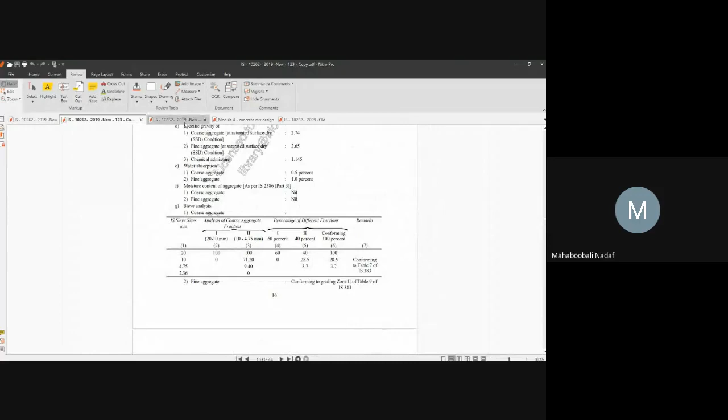Up to this we have completed. Now we have to do this portion. What is that portion? Any water correction we have to make in site or not? That means whether the aggregates are absorptive, we must check water absorption, or aggregates already have extra free moisture. So that is also you have to do.

If aggregates will absorb the water, then you need to add water. Correct? Yes, sir. I will just make it bigger. Whenever aggregates are given in this condition, if water absorption of coarse aggregate is this much and fine aggregate is this much, aggregates will absorb water from the concrete. So to counteract that, we want to increase the water.

If you are increasing the water, you have to decrease the aggregate to make it stable. In this problem it is not there, but if moisture content is present, that means any aggregate already has some extra moisture, then water content has to be reduced and aggregate content has to be increased. Is this point clear? Yes, sir. Now for this I will draw a table.

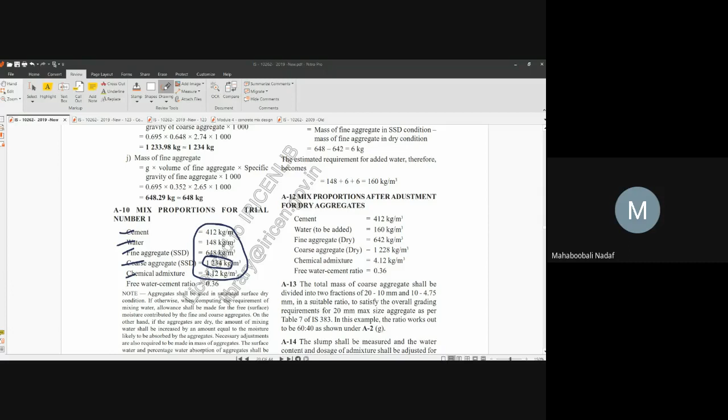Okay, now 1234. Here I will write 1234. For fine aggregate I will write here. Now, for coarse aggregate, how much is the absorption value? This one, 0.5%. 0.5% of this, how much?

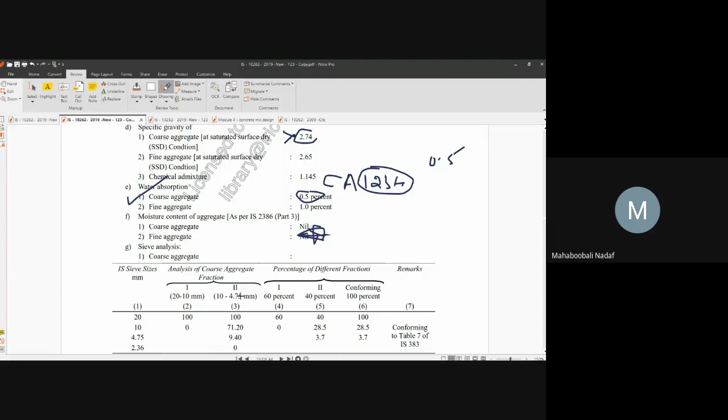Just 1 minute, prayer is going on. Just 1 minute, okay? Okay, now shall we continue? Yes, sir. Everyone, please give response.

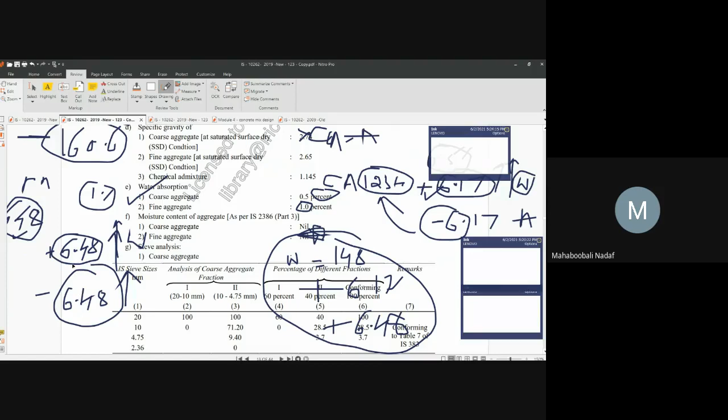Now for coarse aggregate, we need to deduct this value. That is why I have written with minus sign 6.17, the same value. So 1234 minus 6.17 is the site corrected coarse aggregate. Similarly, here 648 minus this is corrected fine aggregate. Is that okay now? Yes, sir.

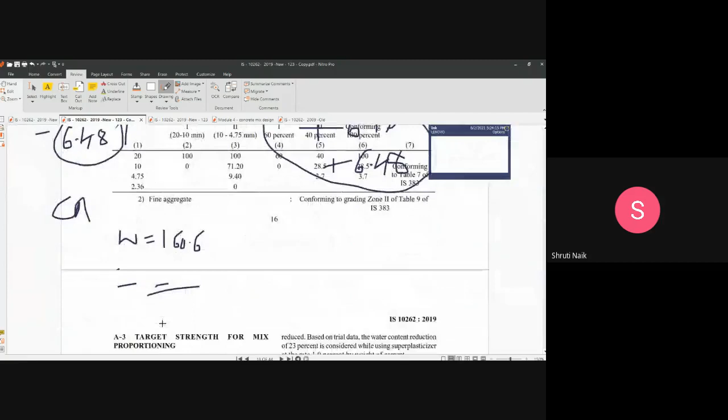Corrected water content, how much did you tell? 160.6, correct? Yes, sir. Corrected coarse aggregate, how much are you telling? 1234 minus 6.17, how much? 1227. Please remember these values, okay?

Corrected fine aggregate, how much? 648 minus 6.48, 641. Okay, remember these three values.

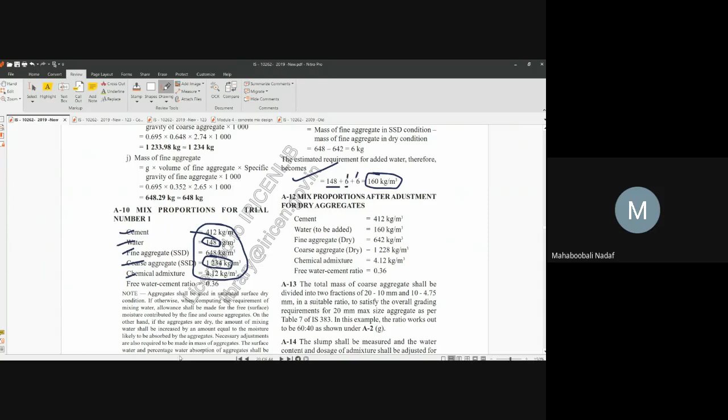Correct? Yes or no? Yes, sir. So what they have done, 148 plus 6 plus 6 - this is for coarse aggregate, this is for fine aggregate. Now you come here, fine aggregate or coarse aggregate?

Coarse aggregate. How much is the coarse aggregate, our value? 1227. Whether that is what they have done, where is that coarse aggregate? This one, yes or no? Yes, sir. Correct, na? Yes, sir. Similarly for fine aggregate, how much have they done?

642. Our value is how much?

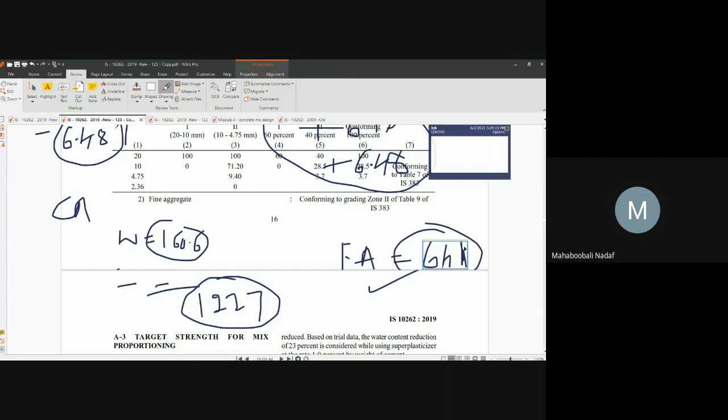Our value is how much? 641, 641 point something. So that is correct. Yes sir, okay na? Now the problem is over.

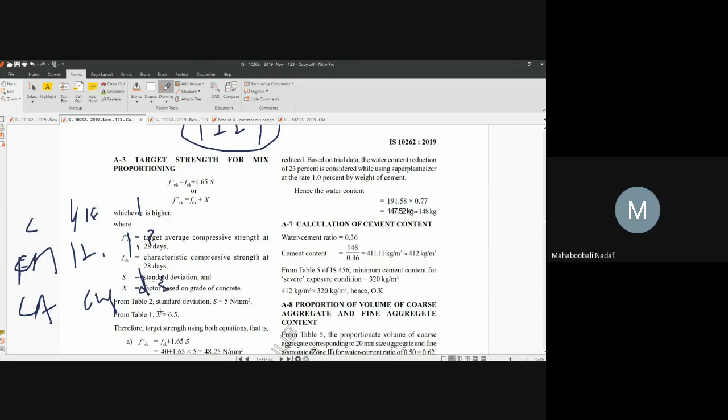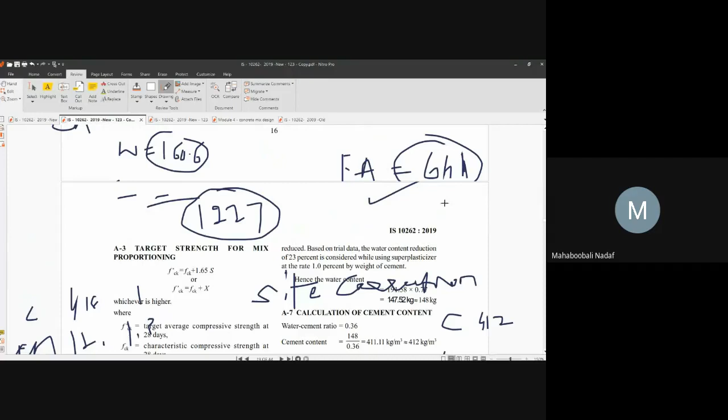Mix proportion, remember? Percentage. Yes, the same thing has to be done for this also. You have to write at the heading site correction. You have to do site correction. After that, you have to write cement, fine aggregate, coarse aggregate. Their values 412, and what is corrected? 641.

1227. So can you divide it by 412? 641 divided by 412. Yesterday, how have we done it? 1.57. So similarly, you do it for this one.

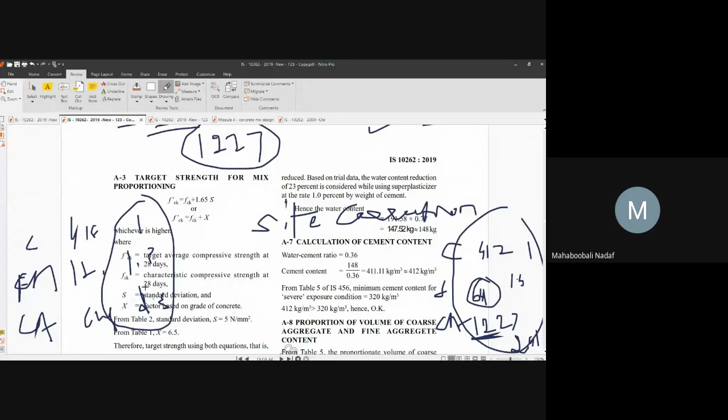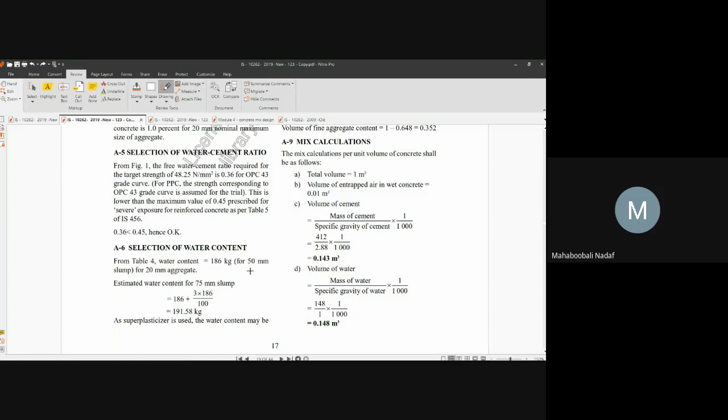Okay, very good. So my suggestion is that you at least practice this one by seeing the video. You have to make your own notes for this type of problem. Is that okay? Until and unless you prepare your own notes using the video, then only you will have sufficient grip on this problem. Otherwise you will forget.

See here, how they have done it, they have solved the problem, but according to our steps it is not there. They have done it like this, but I am telling you in the easiest way. So that is why make your own notes for this.

So the same thing they have written after correction, whatever you got. Correct? So this is before site correction. You have to write it. And again, here you have to write the ratios of whatever you have calculated: fine aggregate divided by cement, coarse aggregate divided by cement. Like that you have to write. Is that okay?

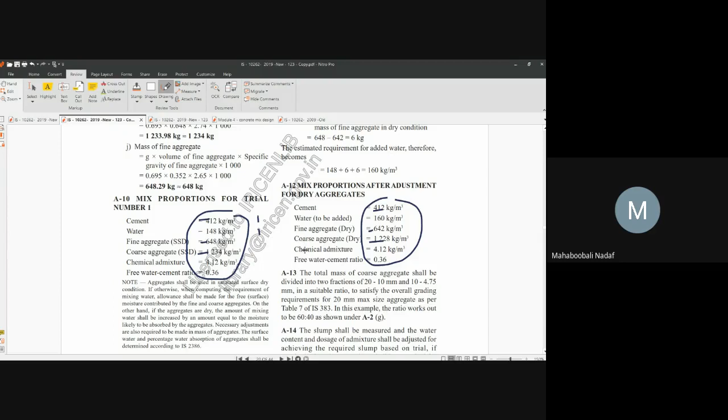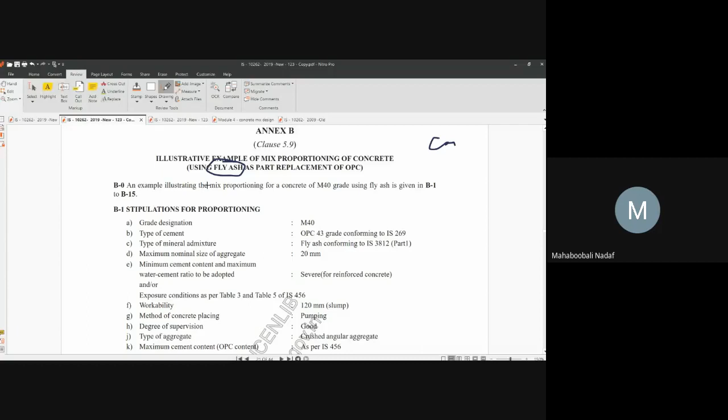Shall we go to the next problem? Okay, so in the previous one, this problem also we are doing by 2019 edition only. Tomorrow we will solve using 2009. Here we also do 2019 only because we will continually solve two problems. In the previous problem, only cement was there, but in this problem they are asking us to add fly ash.

Is that okay? Now please read the data carefully. Grade they have given M40, cement 43 grade, normal. They have also asked us to add a type of mineral admixture. What have they asked? Can anyone tell me? Fly ash.

They have asked us to calculate fly ash. Second, what is it? Maximum size of aggregate 20 mm, very important. And what is this? Severe, for reinforced concrete.

Others can also give response. Okay, others can also give response, no issues, but if you're simply sitting quietly then you will not understand the problem clearly, it's your problem. So many times I am requesting, you people are not at all answering. It's up to you. Climatic condition, very good, very good, very good.

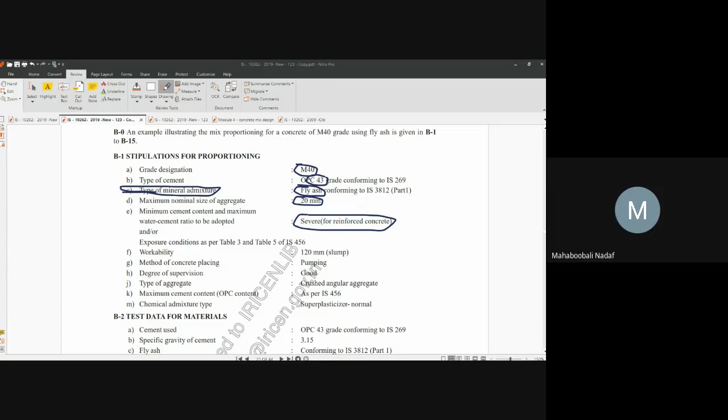What is this? Outside environmental climatic condition, exactly, this is called exposure condition. Okay na? At least tell me whether you are following me or not. Everyone please give response, at least whether you are following me or not. Okay, at least try to give that much. You are not able to answer, forget it, okay, at least give me that, sir we are following.

Take a pen, paper, calculator, and also the table. Now what was the slump given in this question? How much, fast read it. 120 mm slump they have given, and normal placing of concrete is not there, but you have to do pumping.

Degree of supervision good, so type of aggregate crushed, that is no problem. Cement content we have to refer to IS 456. Plasticizer also they are using. Specific gravity of fly ash, super plasticizer, specific gravity of coarse, fine, super plasticizer. Here they have given what?

Water absorption has been given, and also free moisture has been given. Here they have directly given 2 minus 0.5, meaning total moisture content is 2, and absorption is 0.5. So free moisture is actually 1.5. Like that you have to understand, while solving you'll be knowing.

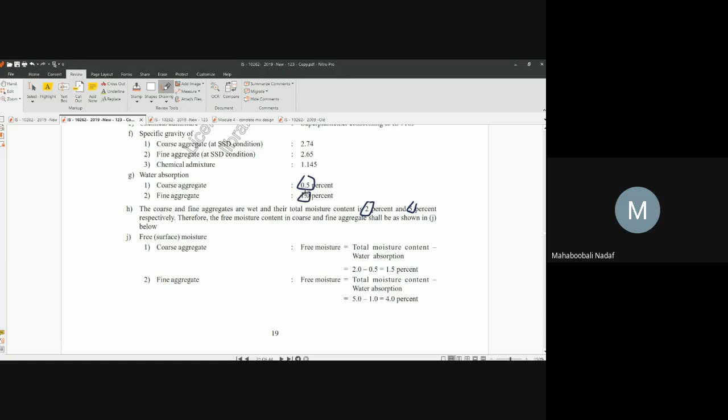So here only you try to understand, moisture present is 2% for coarse aggregate. For fine aggregate, moisture present here is 5%. Absorption, no doubt, you forget this one. Try to concentrate here.

Now this is the last table, and it is zone 2. Now one by one we will proceed.

First step, target mean strength. So yesterday you have done this. Tell me, FCK dash equals FCK plus 1.65 into S, or FCK dash equals FCK plus X. So now which table do you have to select?

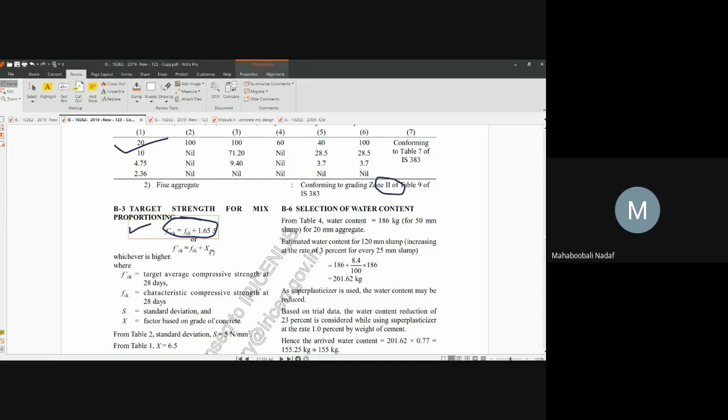Table number 2 and table number 1, sir. Very good, very good, very good, Shruti. You are a very good person.

So for table number 2, what is M40? Standard deviation is 5. So what are they using? FCK plus 1.65 S. What S value is used here? 5 Newton. So this answer is coming out to be 48.25.

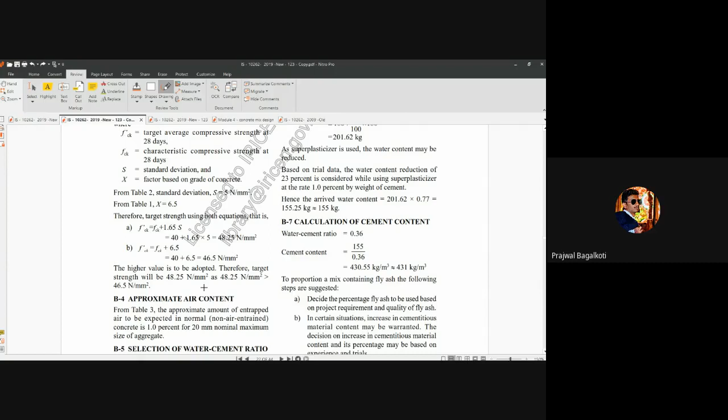Next step is the volume of air. So how much air do you want to take using this table? Table number 3. So what was our aggregate size given in the question?

20 mm, sir. For 20 mm, what is the percentage of air? 1%. So how to write that one? V air equals 1%, or 0.01. Is that okay? Yes sir, okay very good.

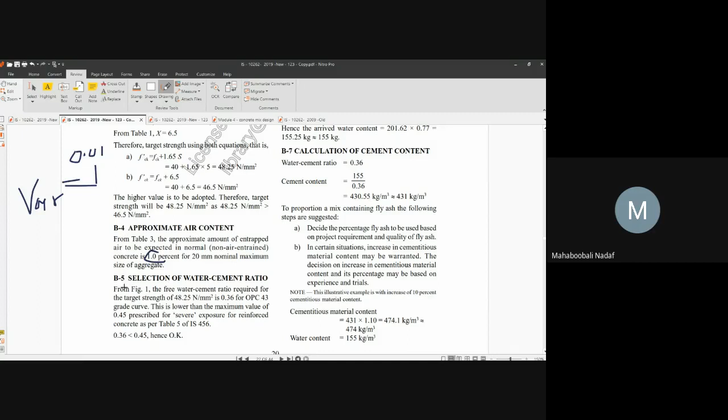Now shall I go to the next step? Sure sir, yes sir. Selection of water cement ratio.

Selection of water cement ratio. So which graph? What is our target mean strength? You remember this one, 48.25. Which graph do I have to select here? OPC 43 grade curve, 43 to 53.

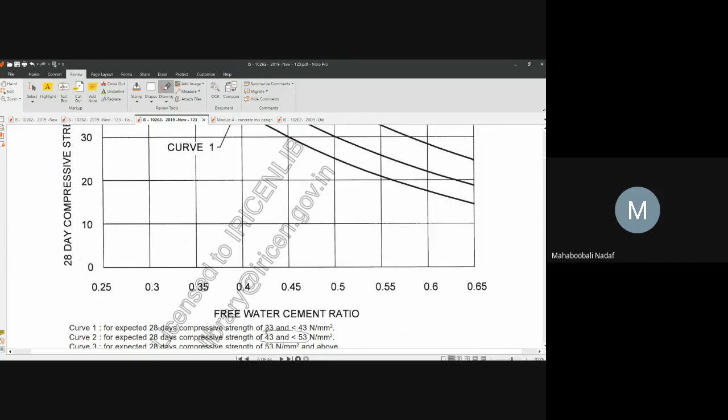This is curve 2. We have to take curve 2. In curve 2, I have to take 48 like this, and project like this. So yesterday also it was here only. So we are going to take next to 0.35. How much? 0.36. Very good.

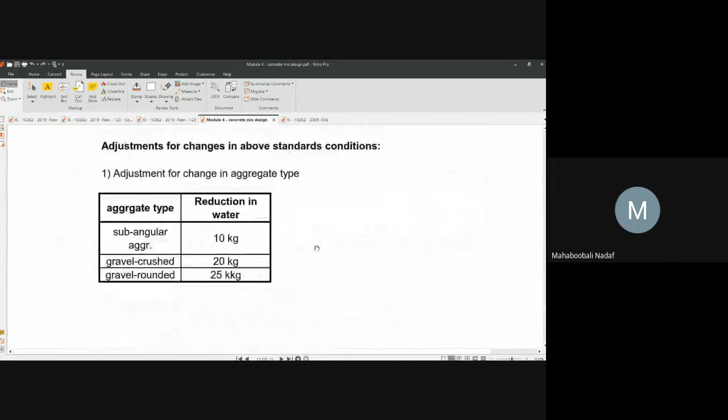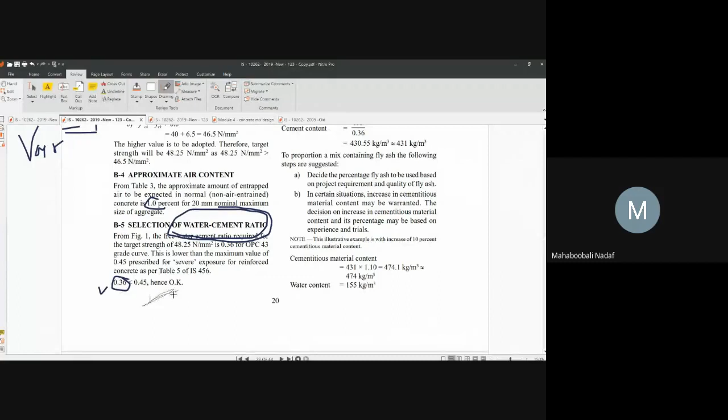So what is the maximum? 0.45. What is adopted? 0.36. So it is less than 0.45, hence it is safe. Is that okay? Yes sir, yes sir, yes sir.

Selection of water content. So which table do I need to refer to? Table number 4. Very good, Shruti, very good.

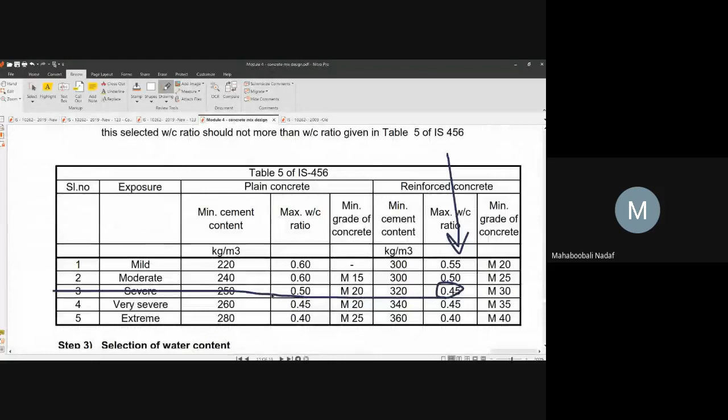So how much should I select? What is the aggregate size given in the question? 20 mm. So what is the water content? 186 kg. So they have taken 186, but that is for how much slump?

50 mm. First, we will check the condition whether the problem is angular, crushed angular, or some other angular aggregate. Crushed only. So there is no correction for this one. Is that okay?

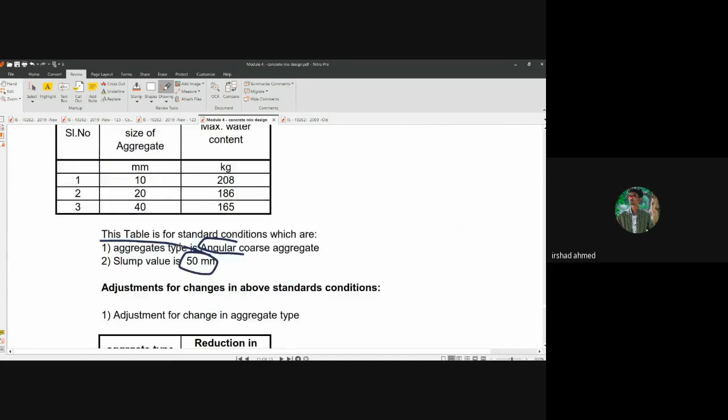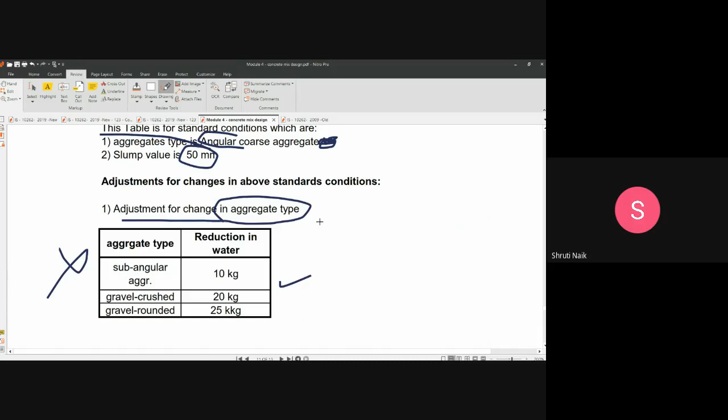If there is a change in aggregate type, whether there is any change in aggregate type compared to our standard angular coarse. No, sir, this is our standard. In the question also they have given the same thing, so there is no correction for aggregate. But have they given 50 mm slump in the question? 120 they have given, sir. 120 mm slump they have given, so that is why we have to make the correction.

Now you tell me how much increase. 70, sir. 50 to 120. Okay, so how much increase? 70, sir.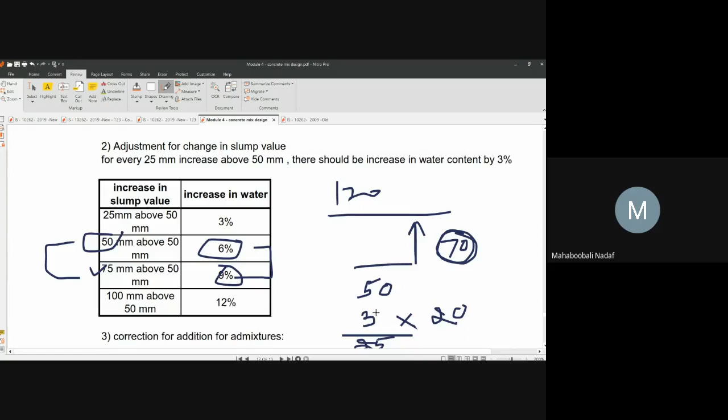It is just less than 9. How to do this one? Take the difference of this, take the difference of this. So that is what we call, in mathematics, interpolation. We call it as what? Interpolation. For 25 mm change, 3%. So for 20 mm, how much? This is called interpolation. 2.4.

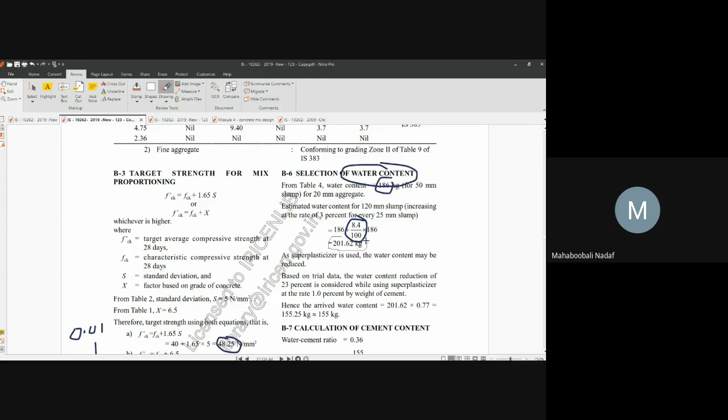3 by 25 into 20. Simple mathematics. So this is 2.4. This 2.4 is added to 6. Is that okay? Yes, sir. That is what he has done. 8.4%. So how much is that? 201.62 kg. Now this step is clear. Now, they have given superplasticizer in the question, and we know that we can reduce the water content up to 30% if we are using superplasticizer. So that is why that person has selected 23% reduction. So directly he has taken 0.77.

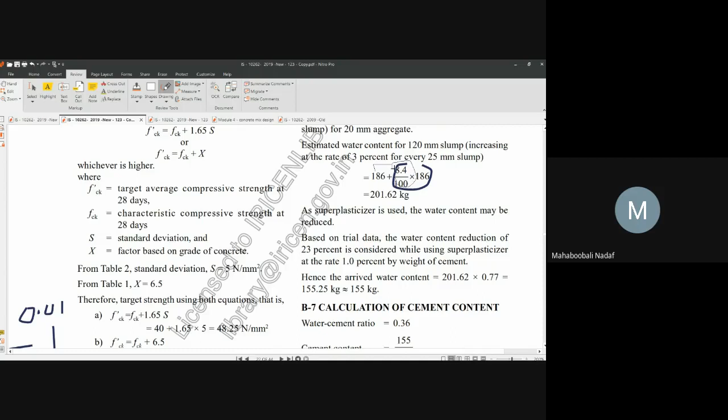If this value has to be reduced by 23%, how are we going to write it? 201.62 minus 23 by 100 into 201.62. Very good. How much is it coming?

So how much? 155. Very good. Is it clear now for everyone? Yes, sir. Very good. What is your name? Who has told the answer? Sir, Irshad Ahmed. Very good. Participate like this, then you are going to understand. Okay? Same thing. So what have they done?

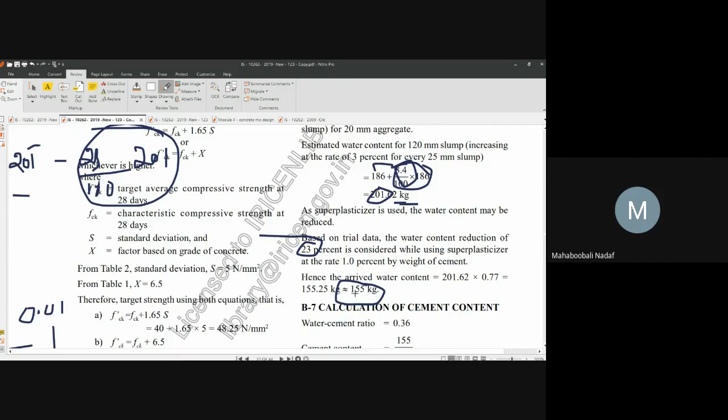Original value, 23% decrease: minus 23 by 100 into this value. So it is coming out to be 155. This is your corrected water. Okay? Now, as usual, we know the water cement ratio. Sorry, cement content is equal to water content divided by water cement ratio. How much is it coming? 431. This step is clear for everyone?

Yes, sir. Okay. Cement content is equal to water content divided by water cement ratio. So 431 is coming. Now, in the question they have asked that we are adding fly ash. So this is not cement, this is cement plus fly ash. In the previous problem, only cement was there, but in this problem cement plus fly ash is there. So 431 includes cement plus fly ash.

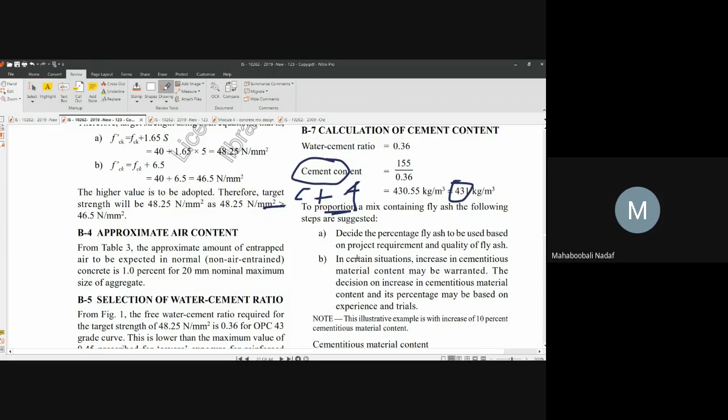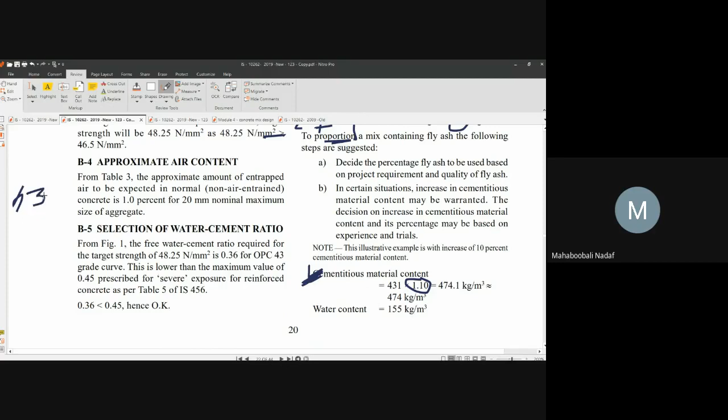Because we already studied in module 1 and module 2 that fly ash reacts late. Correct? To have better strength, they are increasing this cementitious material by 10%. That is why we multiplied by 1.1. How to increase 10%? 431 plus 10 by 100 of 431. This is the increase, no? Yes, sir.

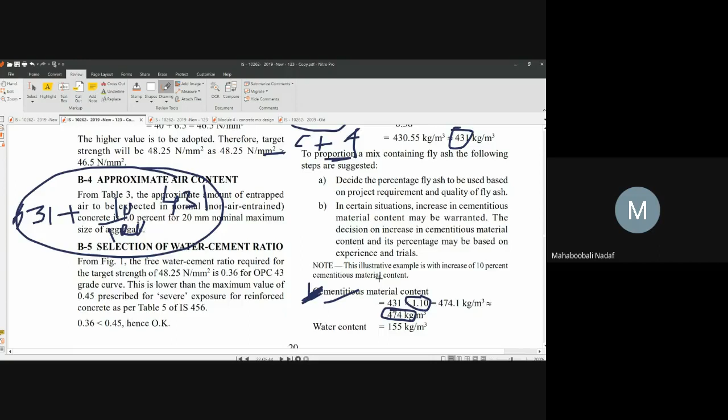This is simple mathematics. They have increased the cementitious material by 10%, so 1.1 into 431. How much? 474 kg. This step is clear? Yes, sir. So 155 is the original water. They have changed the water cement ratio. Why? We have increased the cementitious content, so the water cement ratio is going to change. Yes or no? Yes, sir. Now, next step.

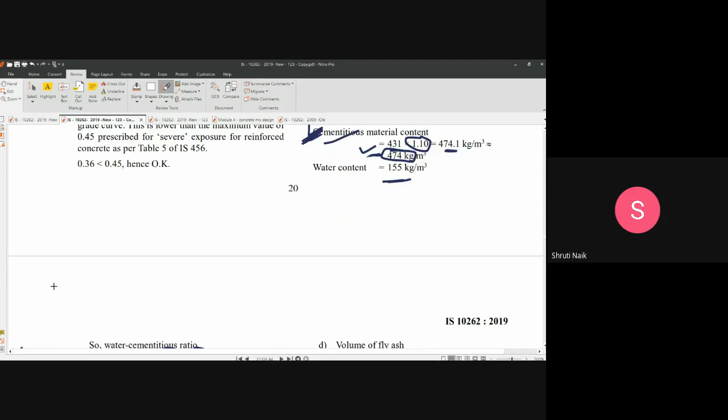Total cementitious material was how much in the previous step? 474. 431 with 10% extra. They have adopted a thumb rule: fly ash will be 30% of this, 70% will be cement. Is that okay? Yes, sir.

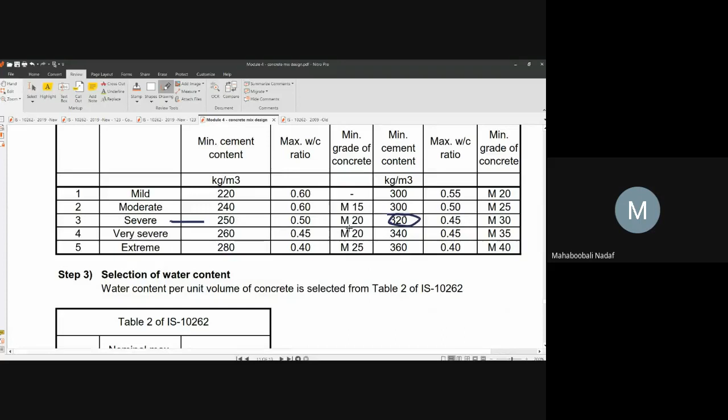Now compare this cement content with our standard IS 456 table. Severe condition, and this is the minimum. How much is this minimum? 320 kg. How much is our value? 332, and including fly ash 474, which is higher than 320. So it is okay. Now it is clear? Yes, sir. This step is clear. Next step.

So V equals V air, V cement, V water, V admixture, and last is V aggregate. In V aggregate, we have VCA and VFA. Correct? Now V we will take as 1. V air, how much is that? 1%, meaning 0.01. Write it on paper, whoever is practicing and replying, so that whenever the data is required, you can give it back. So V air is 0.01.

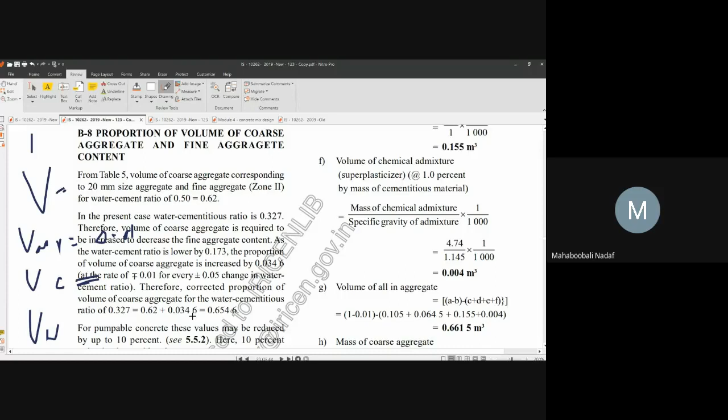Now cement and fly ash both. Here that change is there, so I have to write VC and also V fly ash. Correct? Yes, sir.

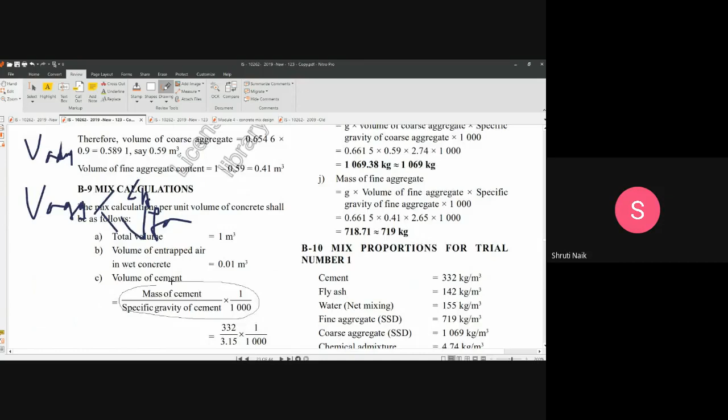Conversion of weight to volume. Volume equals weight by specific gravity into 1 by 1000. Weight of cement is 332, just now calculated. Specific gravity is given in the data. So by substituting, you are getting volume of cement equal to how much?

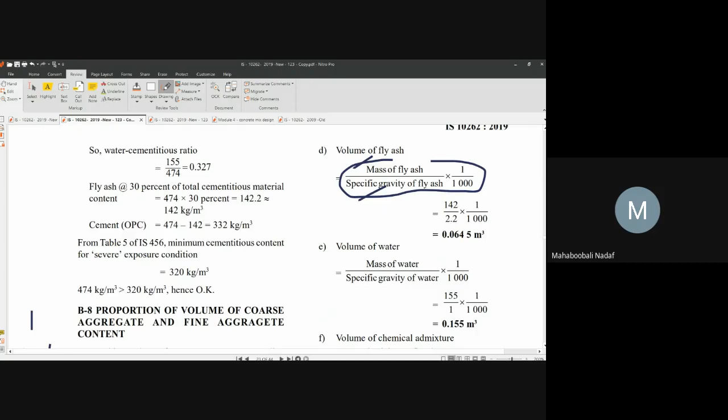0.105%. 0.105 cubic meter. Correct? Yes, sir. Okay, very good. Similarly, calculate fly ash. How much are you getting? Weight of fly ash by specific gravity of fly ash into 1 by 1000. How much? Weight of fly ash, you have taken it as 0.0645, sir. 0.0645. Correct? Yes, sir. Very good. Okay. Volume of water.

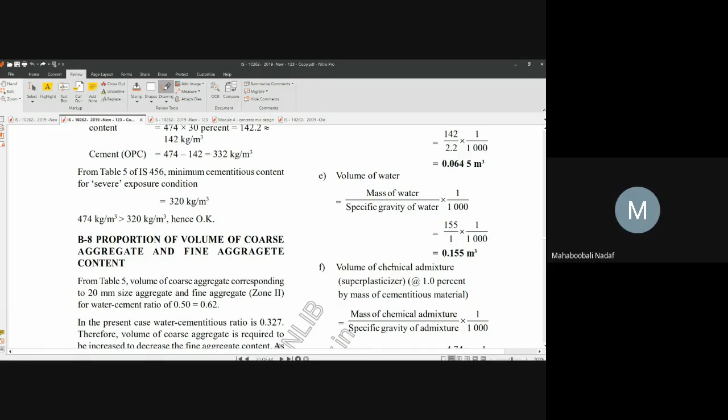That is nothing but mass of water divided by specific gravity of water into 1 by 1000. So mass of water 155, specific gravity 1, into 1 by 1000. How much are you getting? 0.155. Okay. Now for chemical admixture, that is superplasticizer, there is a thumb rule: 1% of cementitious material. In the previous problem we took 1% of cement, but in this problem we are taking 1% of cementitious material.

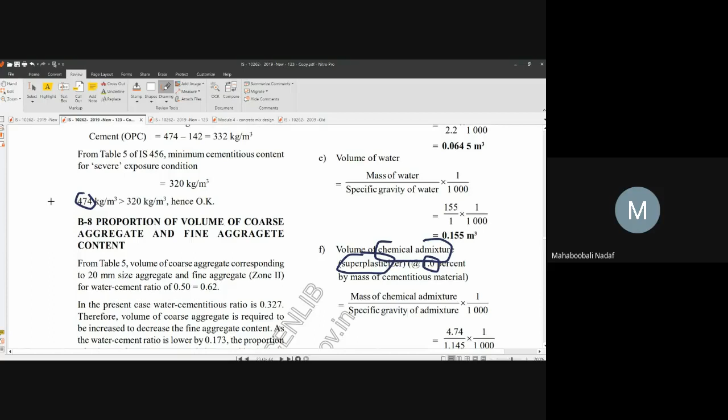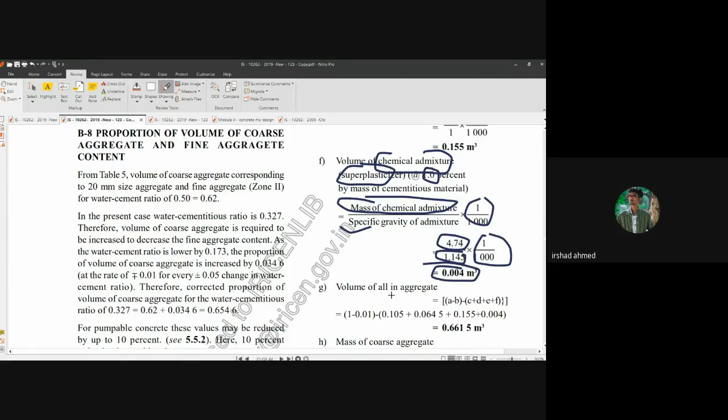So total is 474. 1% of this is how much? 4.74. Very good. So 4.74 is the weight of admixture. Is it okay? Yes, sir. That is why mass of admixture we have written 4.74. Specific gravity is given in the question and into 1 by 1000 they have done. What is the volume? 0.004. Okay? Now V equal to all those things you have written.

Take V equal to 1. V aggregate is the unknown. So 1 minus 0.01 minus water minus cement minus fly ash minus admixture. You tell me V aggregate. Are you people doing the calculation? Yes, sir. Yes, tell me.

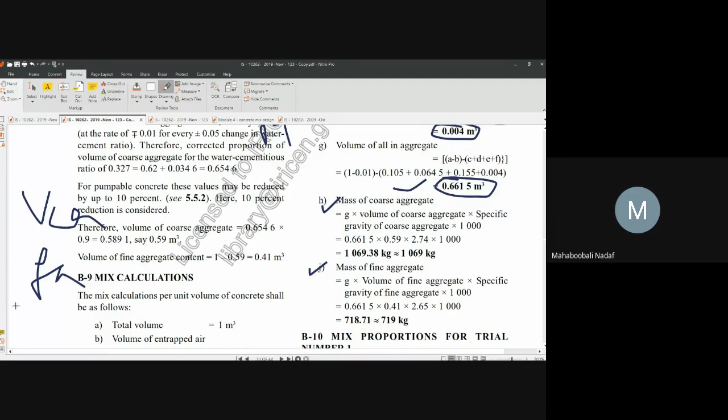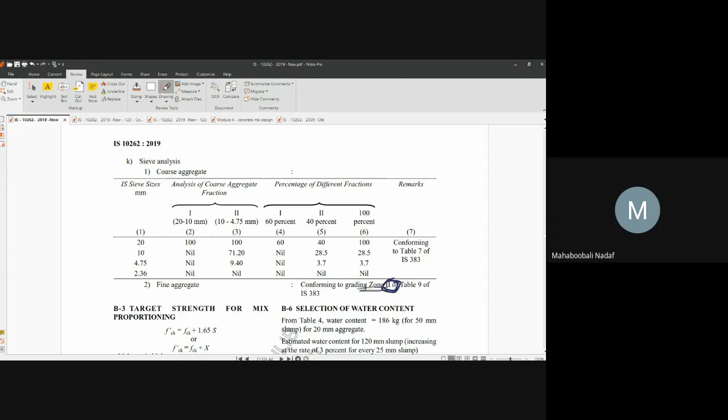Now, how to take that VCA and VFA? Which table? You tell me. This table? Table number 5, correct? Yes, sir. Now, same thing whatever we have done in the last class. What is the zone of sand given in the question? Which zone? Zone 2. So I have to select this column.

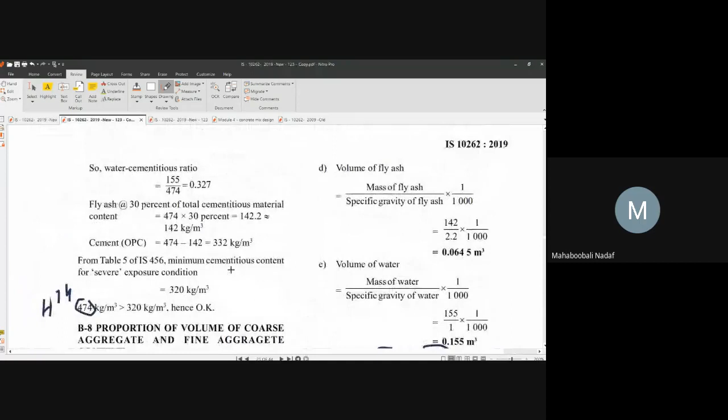And what is the aggregate size they have given? 20 mm. So by intersecting this row and this column, which value I have to take? 0.62, sir. 0.62 you remember. But we have to do some addition. What was our changed water cement ratio? In the last step we calculated the water cement ratio. Is this the water cement ratio? Yes, sir, 0.32.

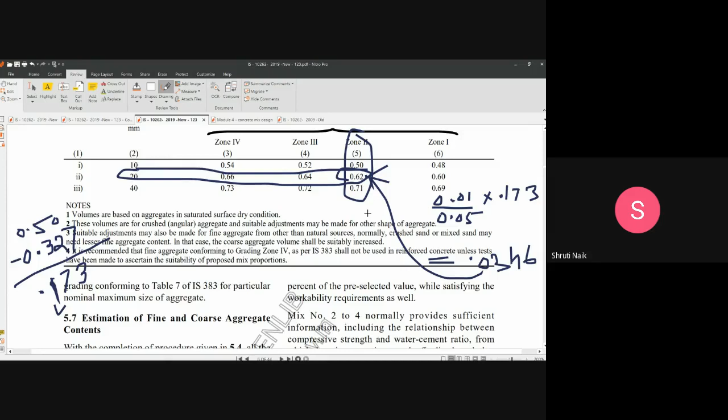Correct? We did the same last time. Yes, sir. How much is this one? 0.6546. This is your VCA. 1 minus this will be your VFA. So 1 minus VCA equals VFA.

How much? 0.3454. One minus this, 0.3454. 3, 4, 5. No need for more digits. You can take maximum 3 digits. Okay. Now, this is inside aggregate. So you remember these two values. I will come to here.

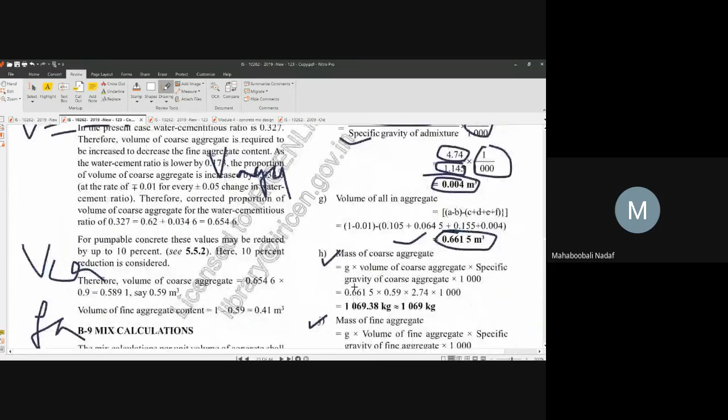Now, what was the volume here? 0.661. They have done a mistake. So what they have to write there? VCA. How much? 0.6546. They need to write it here: 0.6546 and specific gravity and 1000. Similarly, 0.6615 into what they should write? 0.345. Okay. Yes, sir.

One small thing. Okay, one small thing. They have not done a mistake. We have missed one step. This is correct, until this is correct. Okay. 0.6546, this is also correct. So here, can you see 0.6546? Correct or not? Yes, sir.

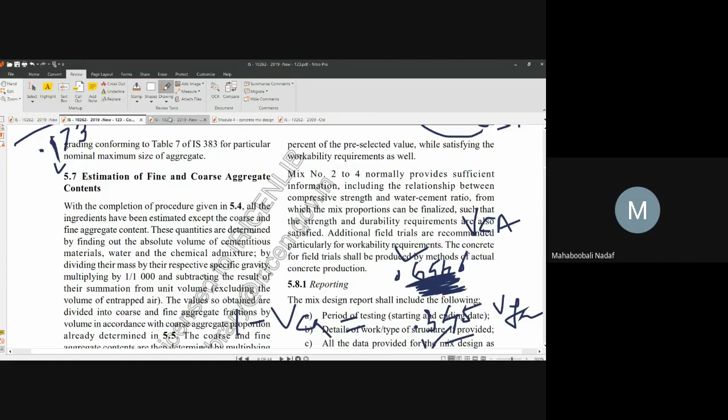0.0346. Okay? See here, they have also added 0.0346 and they got 0.6546 as VCA.

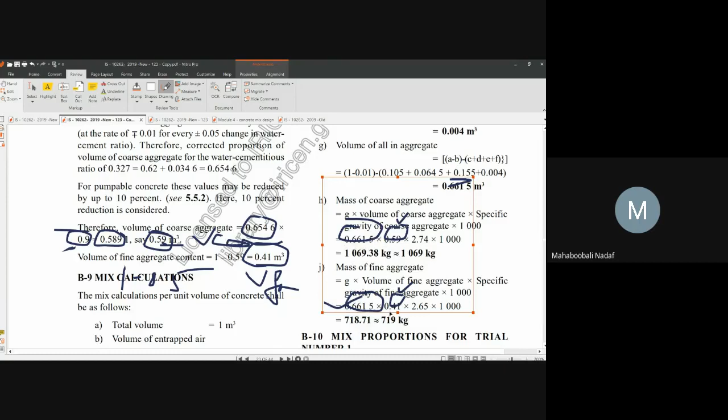0.59, 0.41. This is your aggregate volume from the previous step. Aggregate weight or volume. So 0.59, 0.41, specific gravity, 1000. This will be your weight of coarse and fine. Whether this step is clear for everyone? Yes, sir. Okay.

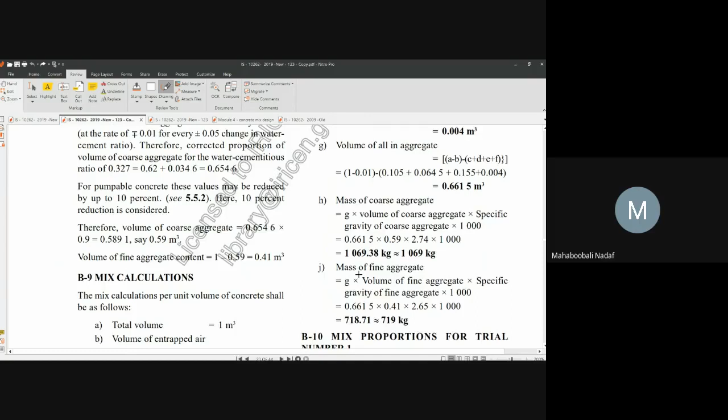Now write it in a table form. How to write it? Cement 332, fly ash 142, water 155, fine aggregate 719, coarse aggregate 1069, chemical admixture 4.74, and water cement ratio 0.327. Now can you divide it by this one?

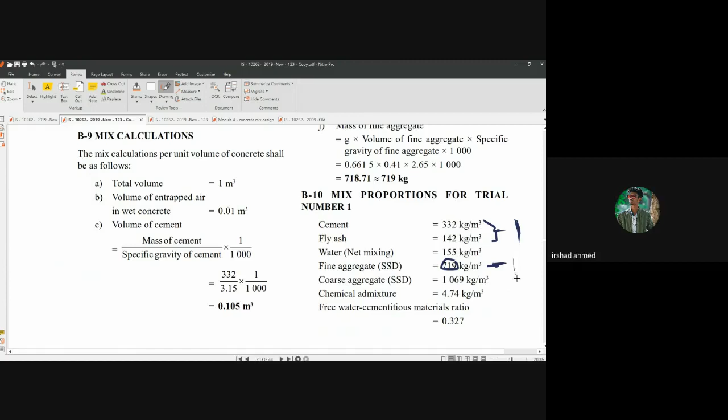474, I will write it as 1. Now you tell me, 719 divided by 474, how much? 1.510. 1.51, okay? Remember this value.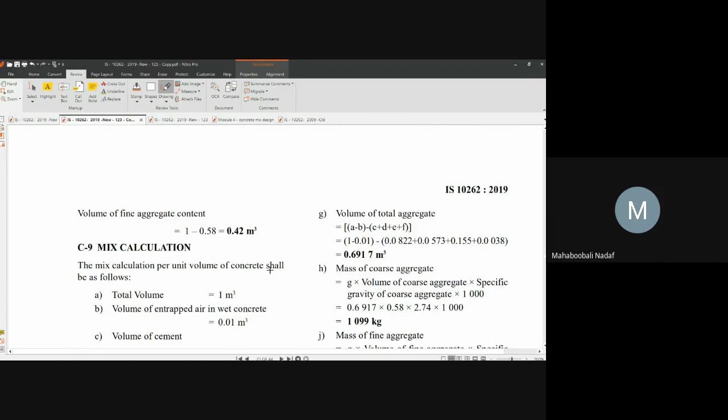Hello, problem. Page number 21. I'm just checking that problem, okay? No problem. This is the problem, okay? No problem. Here, okay.

1.51. And similarly, divide the coarse aggregate by 474. How much? 2.25. So you can write it like this: 1 is to 1.51 is to 2.25. This is your concrete mix design. So 1 includes cement and fly ash. Is that okay? Yes, sir. This step is clear.

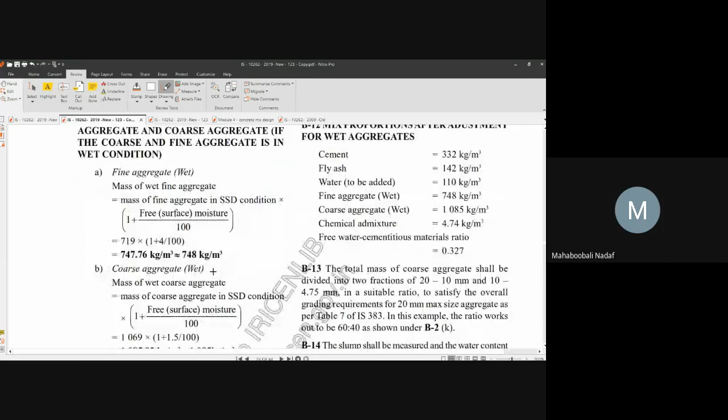Last step is water. Only 2 minutes is there. You remember these values. All these values are called before site correction, that is inside the laboratory. Is that okay? Yes, sir. Now, for site correction, this data we need to take. What is that data? This and 2%, 5%.

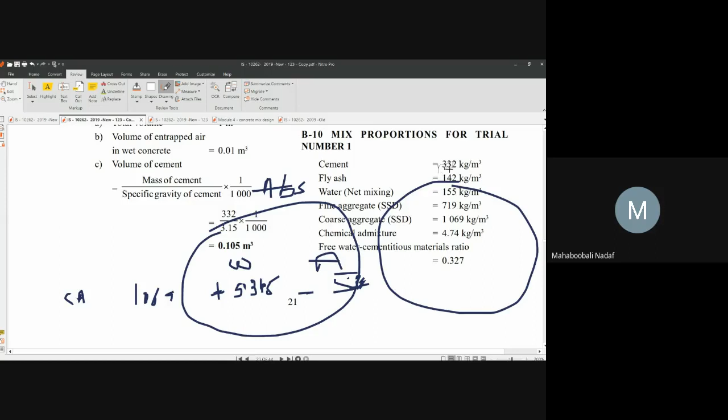Similarly, I will do the calculation for moisture present. What is the moisture present for coarse aggregate? Not for fine aggregate. 2%. Correct, 2%. So 2% of this, how much? 2% of 1069, how much? 21.38.

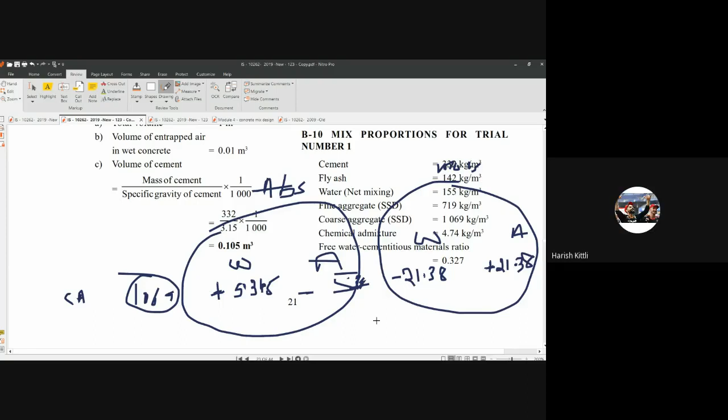Everyone understood this problem, this step? Yes, sir. This step is very important. Now see here, what is the aggregate corrected value at the end? This minus this plus this. Do you agree with this or not? Final aggregate corrected value is nothing but wherever minus is there you minus, wherever plus is there you plus, for coarse aggregate. Now you tell me how much?

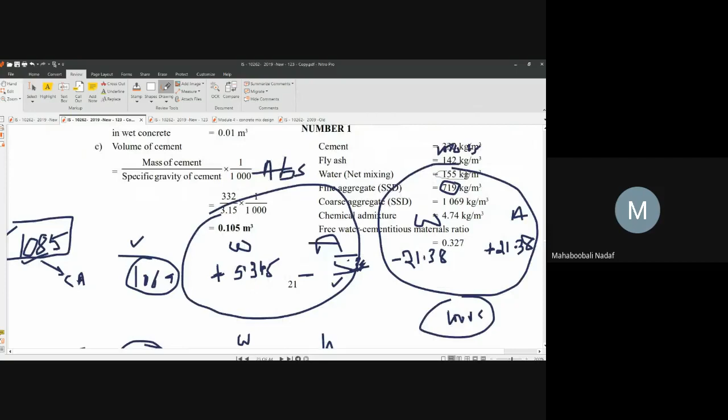746.81? How much? 719 minus 7.19 — 746. 746.81. So corrected is 746. Now coarse aggregate corrected after site, one step. Fine aggregate corrected after site, second step. Water is remaining. What was the initial water content in this step? I am marking there. 155 kg. Original was 155.

Now, very important. Here water add, here water minus. Here water add, here water minus. So 155 plus this minus this plus this minus this. Four values you need to add and subtract like this. Are you understanding? 155 plus this minus this plus this minus this. How much?

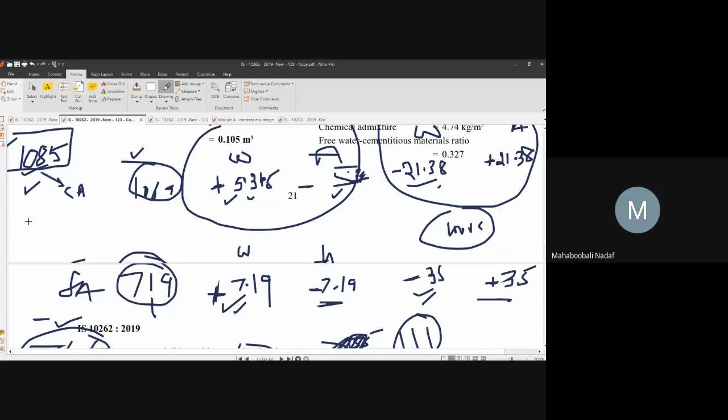Water 111, fine aggregate 746, coarse aggregate 1085 - all these are after site correction, that is very important, that means after applying this water absorption and moisture, we get the final value.

Just check whether our water is 111. 111 is our water. What is the difference here, 111 and 110? Only one, sir - small number, that is not a big thing, correct.

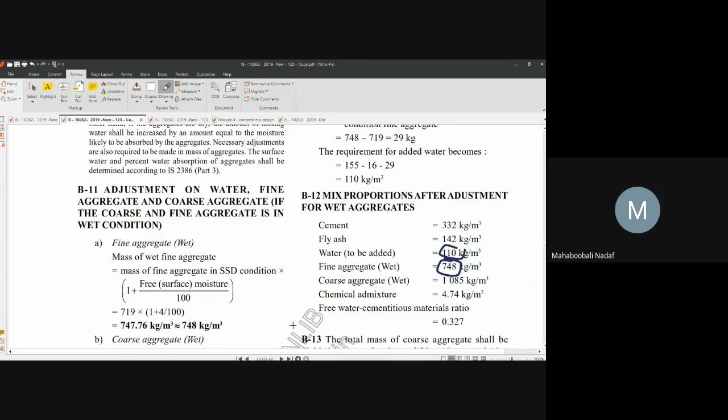Example etc, cement - fly ash will not change for site correction. Whatever they have designed, that will come as is. Water, fine aggregate, coarse aggregate - these things will change. Chemical admixture will not change.

And water cement ratio, you have to do. So can you do this? How have we done it? 474 - it is there, no? So fine aggregate 748 divided by this, coarse aggregate 1085 divided by this. So how much - 1 is to dash is to dash? You tell me.

This is the last step, what you have to do. Whether I am audible clearly for everyone? Yes sir, yes sir. This is the last step. If you are telling me, I will wind up the class.

Sir, 1 is to 1.57 is to 2.28. Very good, very good. Okay, now this is the mix design at this water cement ratio for site, meaning after site correction.

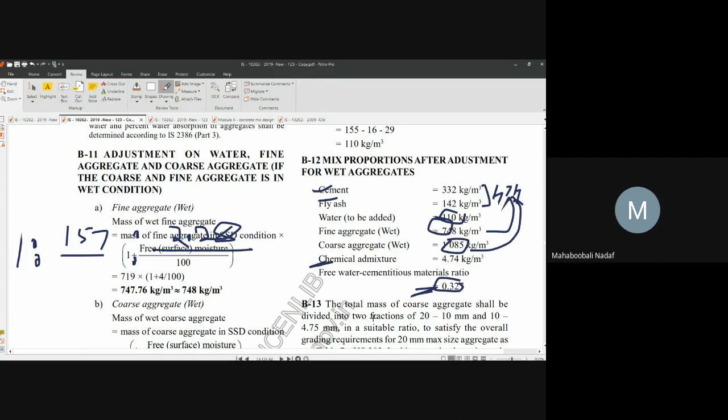Whatever you have done before, that previous step is before site correction. Understanding this site correction is very, very important. According to me, I have explained it in a very detailed manner. Do you agree with this or not? Yes sir, yes sir, okay.